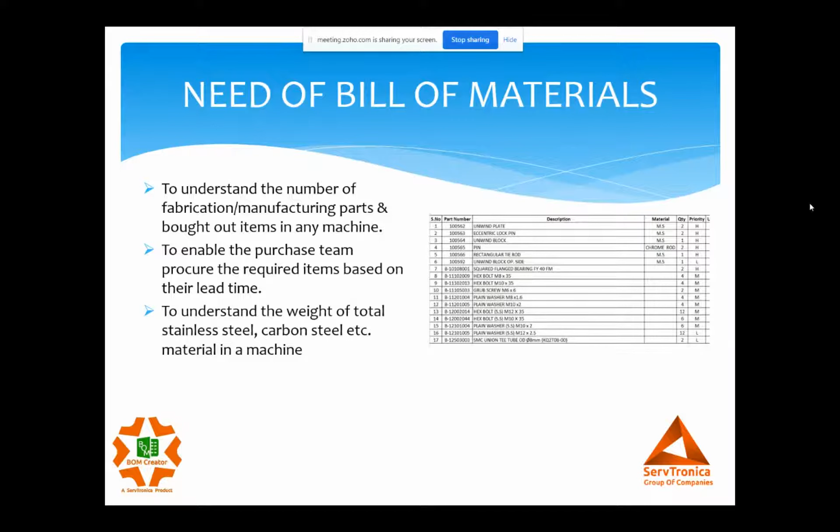To understand the weight. So if I want to make a machine, I need to know how much material is required to make this complete machine, right? That is derived from our bill of materials.

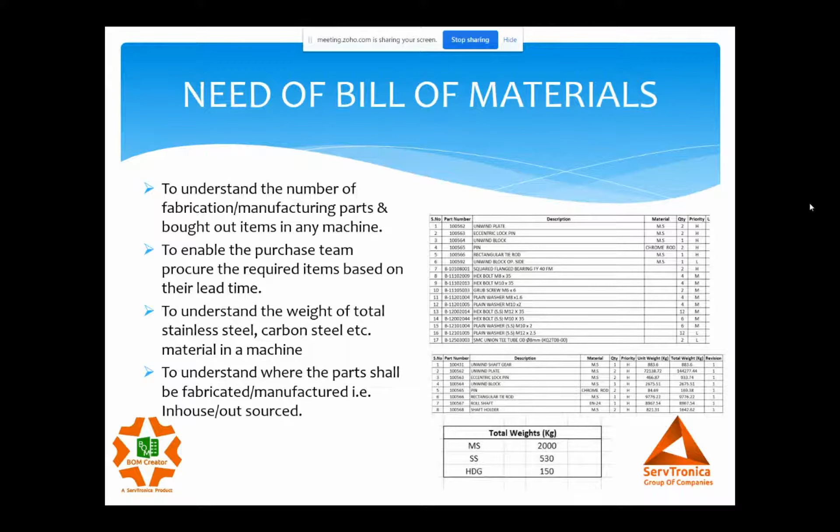Next, to understand what parts have to be manufactured outside, in-house, whatever. There are a lot of things we derive out of our bill of material. So our bill of material becomes the heart of our manufacturing. Without this, manufacturing procurement is nearly impossible.

So before going to BOM Creator, we do have bill of materials in SolidWorks also. SolidWorks does also have some bill of material. In SolidWorks, we have three types of BOMs.

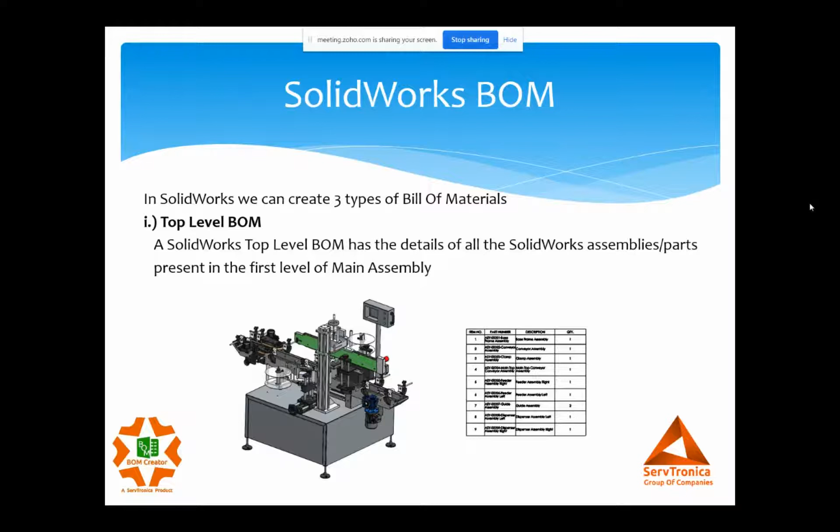First one is top level BOM. In top level bill of material, basically we get the details of all the main level components present in the first level of my main assembly. So if there's a part, an assembly, or a bought out hardware at the first level, we get the details of all those in the top level.

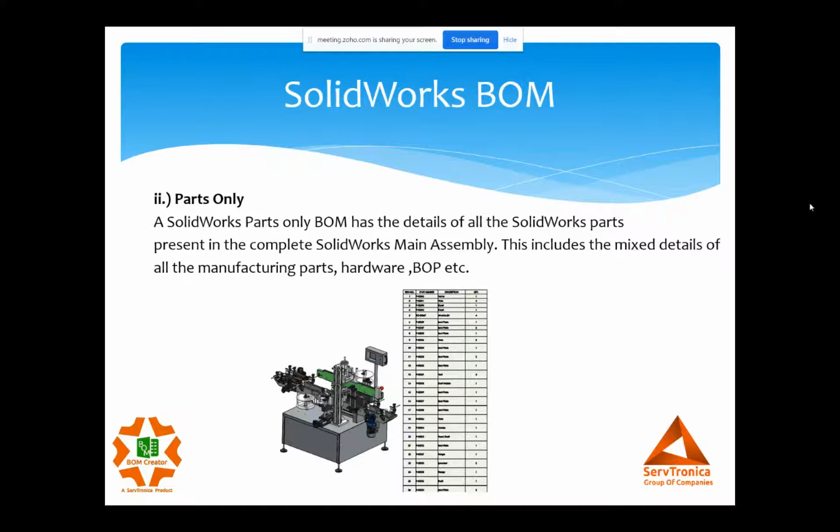Second is parts only. When we say parts only, it gives me the details of all the SolidWorks parts present in my machine. It could be a hardware, a manufacturing part, a BOP, etc. It's a mixed detail.

And SolidWorks indented BOM is something which gives you a hierarchical detail. So when I say hierarchical detail, it means like it has a lot of sub assemblies, and each sub assembly further has some child sub assemblies, some parts, some hardware. So it will give you a level by level detail.

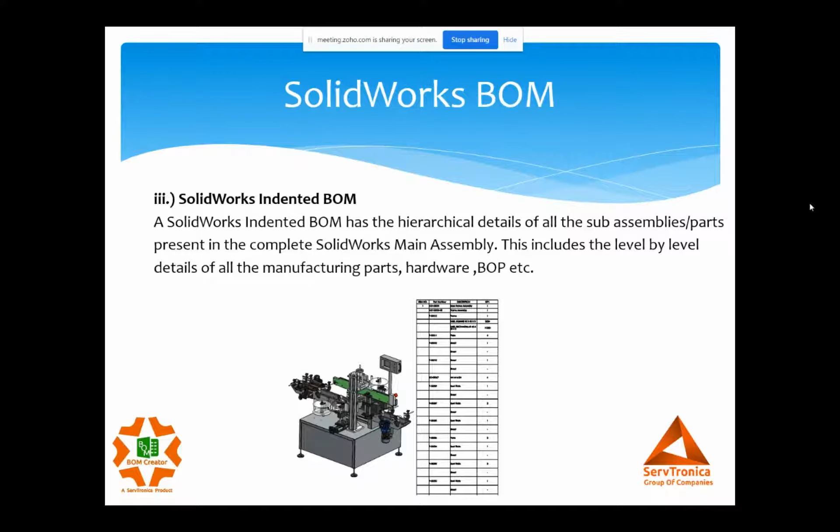So in spite of having the bill of material in SolidWorks, there are certain issues we still face in day-to-day working. The first and foremost thing we face is creating and uploading BOMs in our SAP or ERP system. We spend a lot of time in that. So when we talk about uploading BOMs in the SAP system, this becomes a critical thing.

While we need to, because look, bill of material has to be shared internally with our different departments.

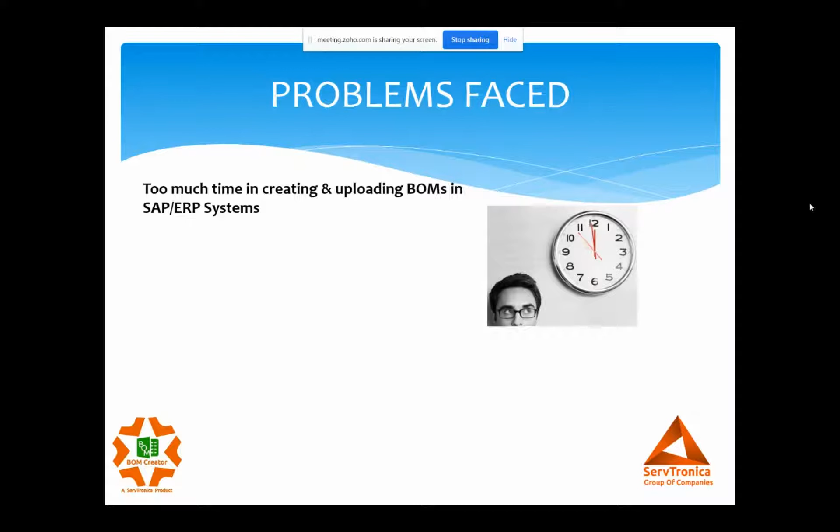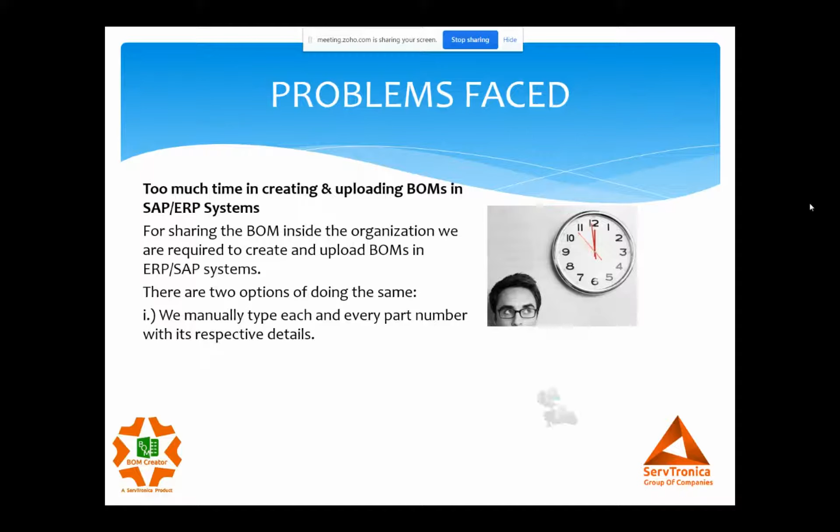So SAP or ERP becomes our platform wherein we share our details. As a designer, we sit and create BOMs. There are two ways we do it: one is we manually type each and every component's details and then upload it, or second is we create something in Excel or CSV or whatever format is compatible with our SAP or ERP system and upload it. So we do it this way for sharing internally.

And we spend a lot of time in that. When I'm handling a 1,000, 2,000 component machine, it becomes a really tedious task.

Second major issue is the chaos between design, production, and planning. This happens because of a wrong or improper BOM. And why does the BOM get wrong? Because I'm creating it manually.

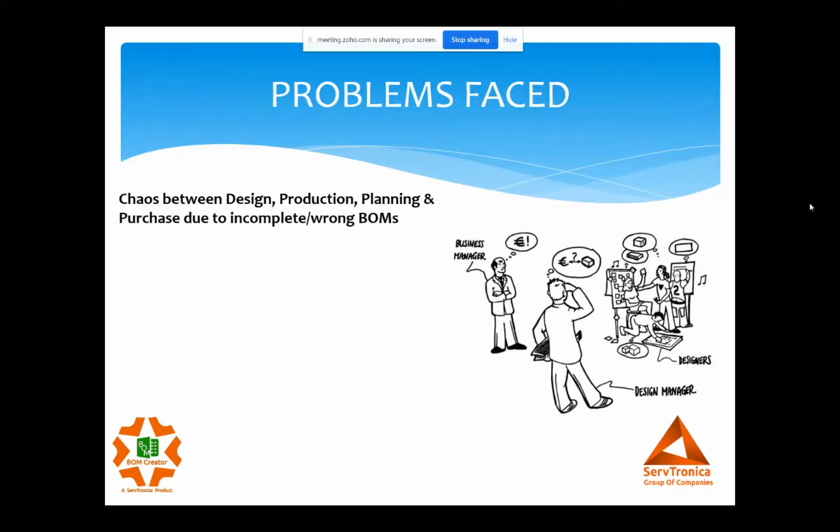When I'm creating a 2,000, 3,000 component material BOM manually, there are chances I make some mistakes. This mistake is not identified during the design phase, but is identified at the end, during assembly or during dispatch, which ends up in a lot of chaos.

Next is the segregation. Why do I segregate my parts? Production is concerned only about the manufacturing items at the initial level, since they have to fabricate everything. And purchase is concerned only about the hardware and BOP, so they don't concern themselves with the fabrication parts.

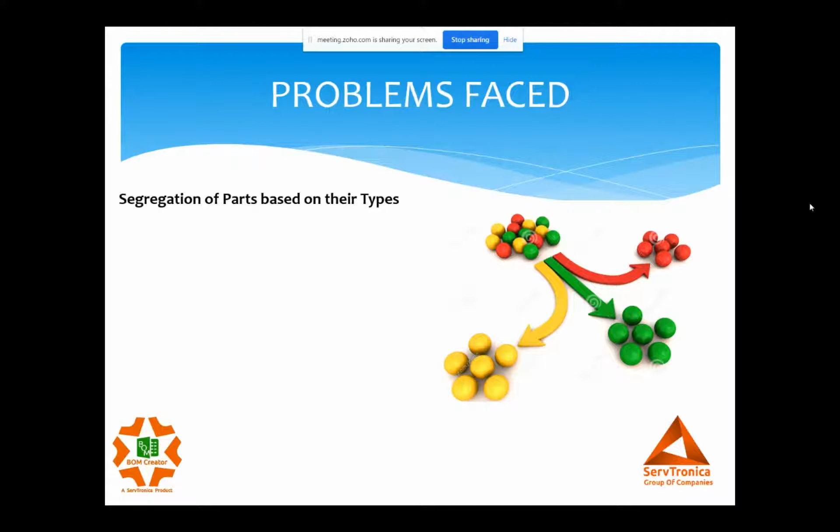So when a BOM reaches the production or purchase department, it becomes their job to segregate their respective items and start working on it. Again, it's a tedious, long time-taking job, sitting and doing manual intervention, and there's a chance we miss something.

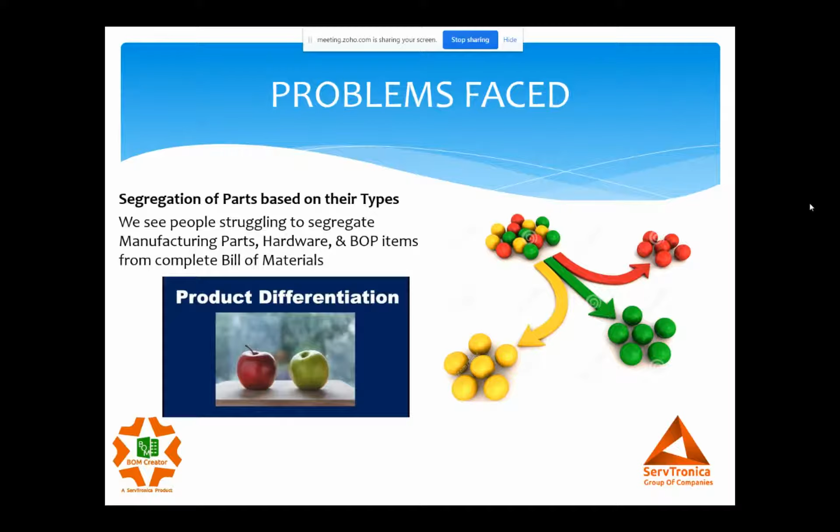Next major issue is the delay in delivery of projects because of improper planning. When we receive an order for any machine or SPM, it could be anything, we have a set delivery date. The organization says I have to deliver it within 3 months of the purchase order. So there's a set delivery date for each and every item.

In our machine, we have a lot of components, and every manufacturing component has its own manufacturing lead time. If I release a drawing today, there's a chance it could be made in 3 weeks from the date of release. There are components which could be made in 2 weeks, or even in 2 days. So every manufacturing component has its own manufacturing lead time.

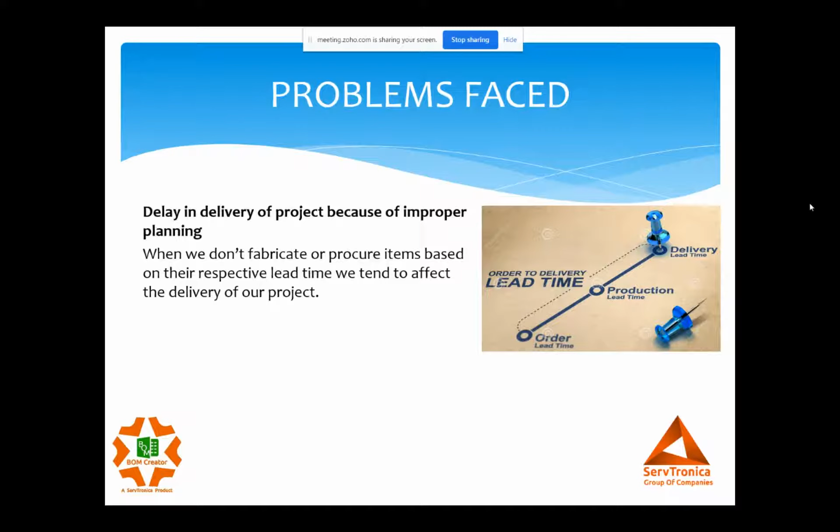So to meet our set delivery date, we need to plan them. The item taking longer time to get manufactured has to be taken first, the item taking average time would be taken next, and items taking minimum time would be taken last. If we do not prioritize these things, we end up getting our project delayed.

Next major issue is the tracking of release of drawings. The designer makes a drawing and releases it to production, purchase, quality, or any number of departments. The designer doesn't have a track of these drawings - to whom he has released them, how many times the individual has released the drawing. So sometimes the designer releases the drawing and production comes back saying they haven't received it, or they missed it.

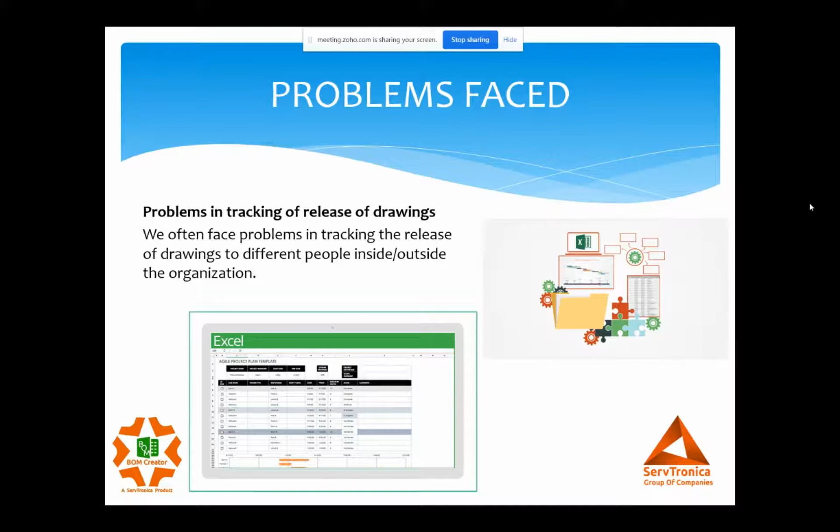Since we do not have a track of this, we maintain it in some Excel records, or maintain some register for that. But still, if we miss making an entry, we end up losing track of this particular thing, which again becomes a goof up inside the organization.

Next major issue is the actualized cost. We do some costing of the machine to understand the budget and how much cost it may take. There are important factors to consider. SolidWorks has something for costing, but it focuses more on operation cost, machining cost, bending and so on. There's something called actualized fabrication cost.

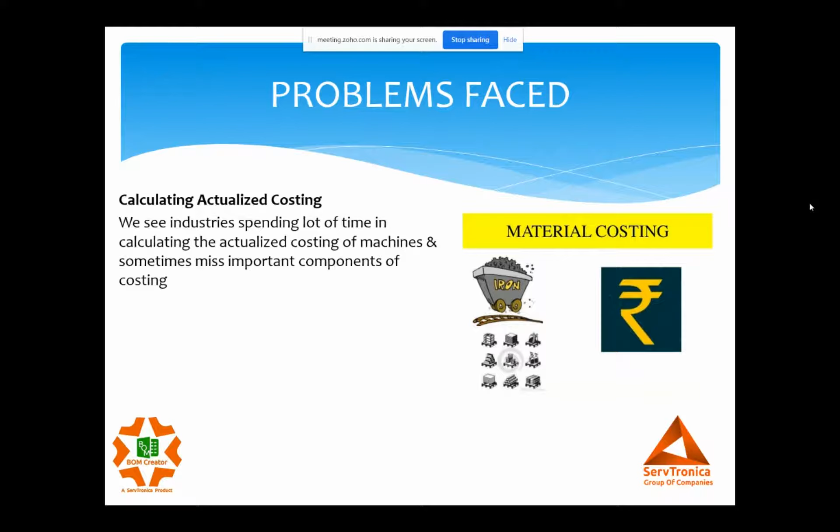So project cost, what we are talking about, we majorly consider five major components of any project: material, labor, engineering, packing, and transportation. These are the five major aspects of any project. So as to understand the budget, we need to have this actual cost in our hands, otherwise it creates a contingency in the complete project cycle.

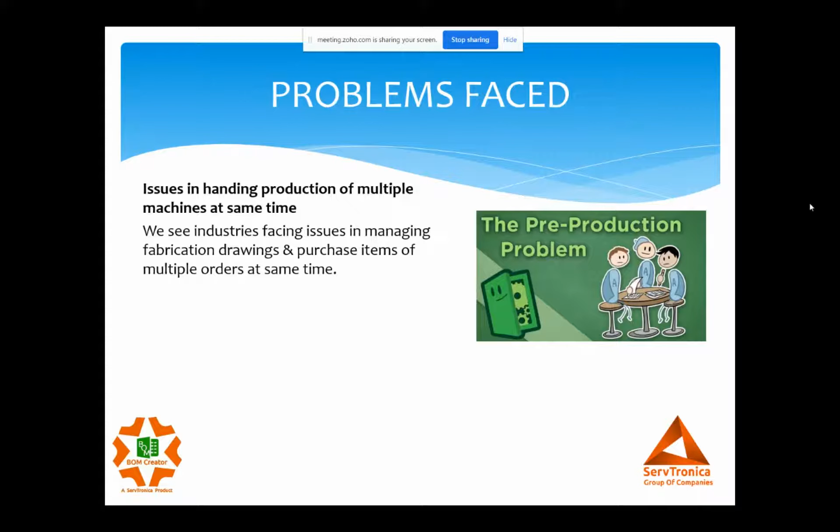Last, what we saw is the production of multiple machines. So now we are an SPM machine manufacturer, say for example, and we have 5, 6, 7 different types of machine models. So when I release these drawings or manage the production, it becomes a tough job for us. Managing multiple projects accurately is another biggest job we face.

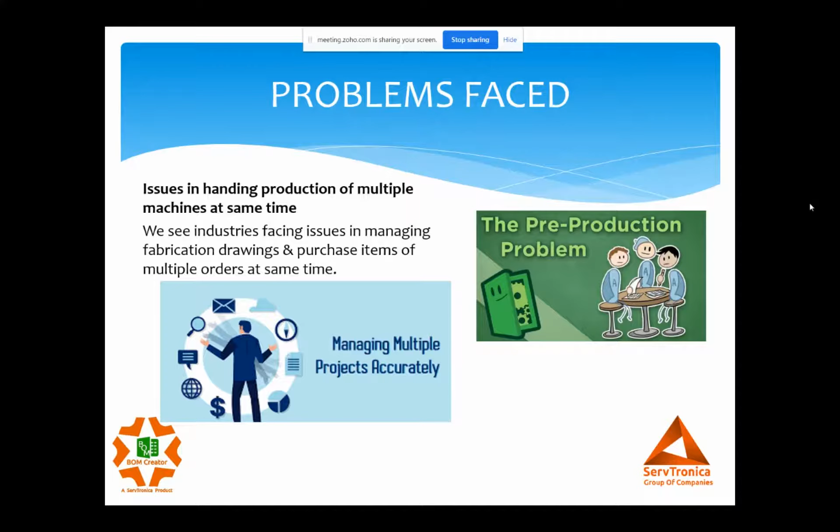Okay, so now let me take you to my BOM creator interface. Give me a second.

Hope things are clear till here. Any questions, any queries? No, I think there is no question, sir. You can continue. Yes, okay.

Can you see my screen? Yeah, it's visible. Okay, perfect. So now, this is the basic interface of our BOM creator.

So now there are two ways where we can use this BOM tool. One is from a separate interface wherein we can launch and start using it, or second is we can use it from SolidWorks itself, from the SolidWorks window. We'll see both ways. First, let me introduce you to the interface of our software, and then we'll see everything live in action.

So now the first option we see is the ERP BOM. When we talk about ERP BOM, what we are saying is you can just create a ready-to-upload ERP BOM directly from our tool. You need not modify, rearrange, or do anything else. You can quickly click, create directly from your solid model, and extract a BOM out of it directly.

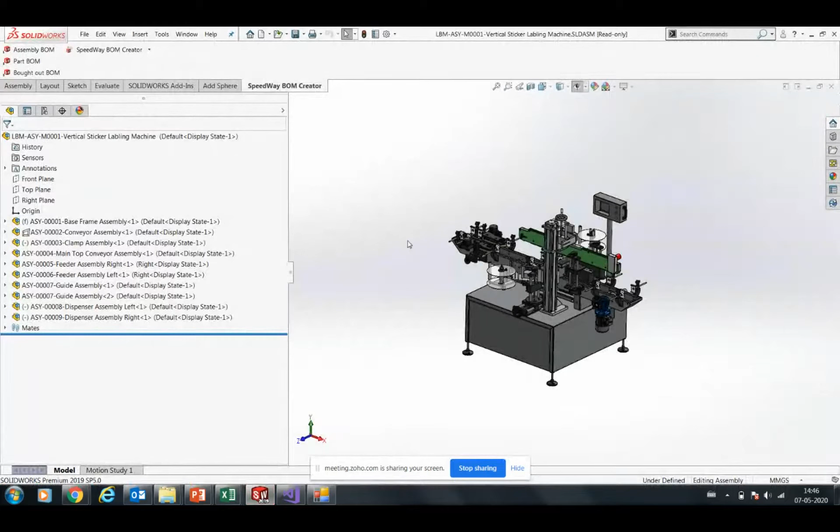Okay, so let me take you to the SolidWorks interface. Say this is a labelling machine. For well, let's understand - we'll be working on this machine for all the reports, we'll be seeing all the major reports of this machine. So now, as I said, you can have a button inside your SolidWorks window wherein you can start creating your BOMs from here also. We'll create both ways, we'll see how it is done.

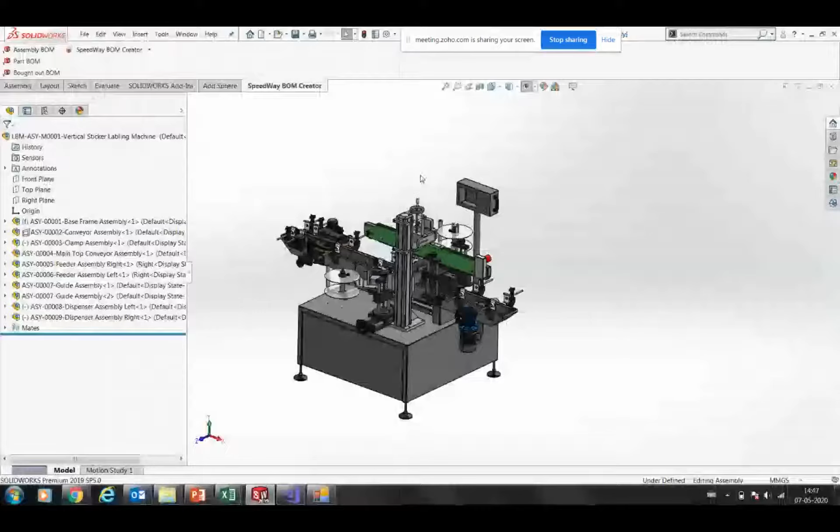So now I'll go first to the interface. I'll say I want to create ERP BOM. Now the best part of this is we will always be working with our main parent assembly of the machine - we do not care what sub-assemblies are available in that machine. We'll always work on the main machine, for which we need the complete BOM. I'll just quickly go - this is the main machine, I'll pick that and say open. Based on the size of the machine, it takes a little bit of time, and it actually creates a BOM which is in ready-to-upload format.

So here is that. So now, this is my ERP BOM. Okay. So now this format can be customized as per your organization's need, right? So when I say customize, there could be certain other fields which you need in your bill of material. So these are the default fields which we have set. These fields can be customized as per your need.

You can share your ERP or SAP format with us, and that format can be used to create it from your CAD system. Okay, so let me explain. Let me explain how this BOM is being created. Give me a second. Yeah.

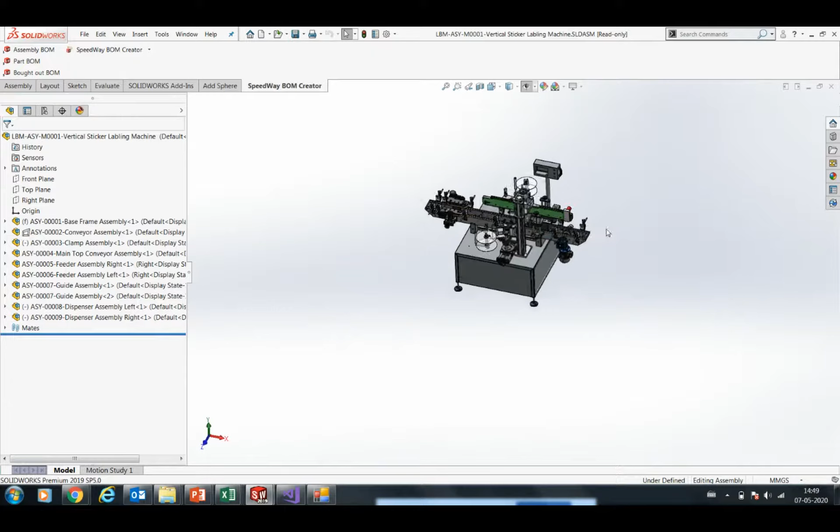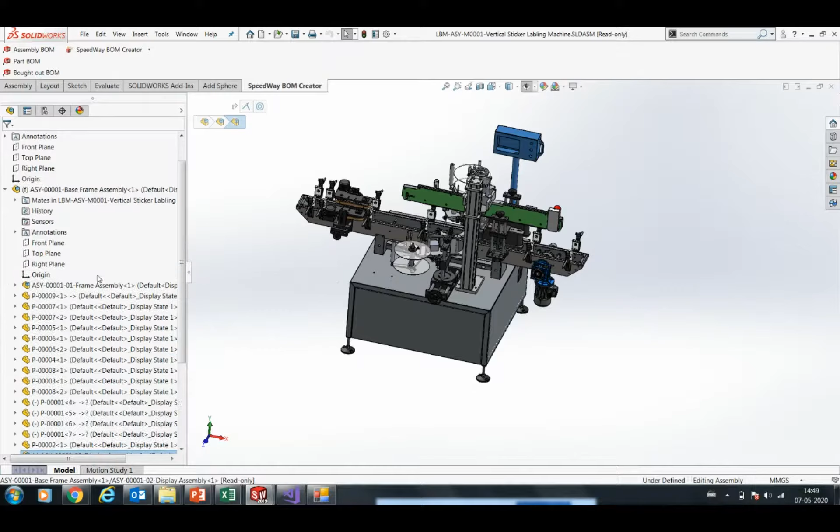So here you can see there is an ASY001 in first, second, third, fourth, fifth, sixth, seventh, and eighth, and so on. So there are first level items, and there is the first sub-assembly. There are further sub children. There are further sub-assemblies, etc. Right. So now this ERP BOM has taken the first sub-assembly. It has given its first sub-assembly and its child, its second sub-assembly and its child, and the main level components. Okay, and so on.

So it has considered each and every sub-assembly and its child level by level completely in the format. Okay, and it has given you the complete details here. Yeah, right. So this is the complete form. Going further, looking further.

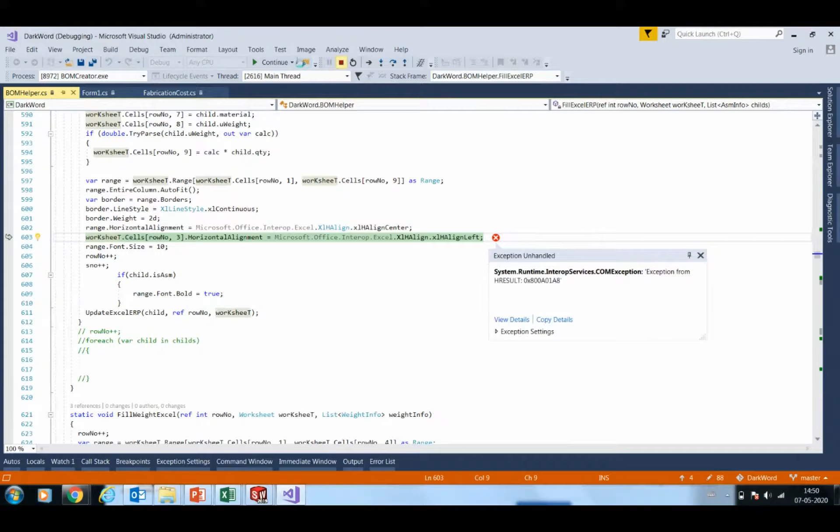Going further, we were talking about the design BOM. Say I want to create a design BOM for this. So I will just create it through the SolidWorks interface, right? So I click here, and again, as usual, it will take a little time to create the BOM, and it will start quickly populating the results.

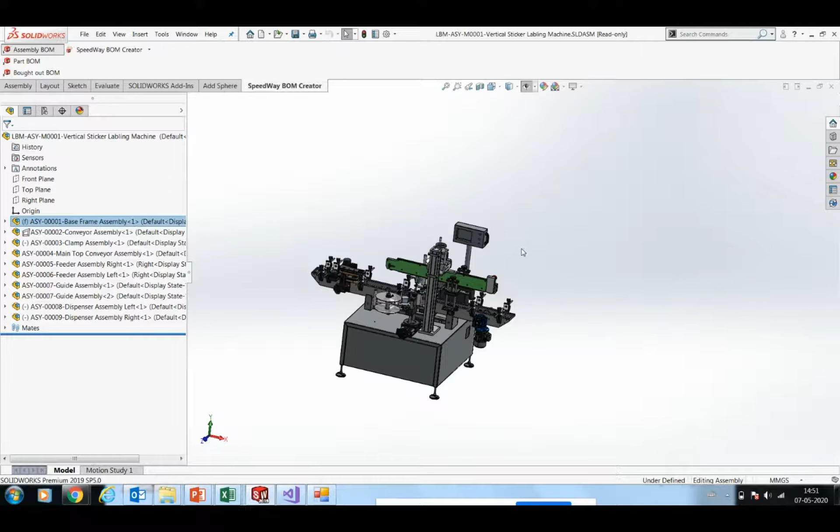Sorry. Sorry. Okay. I click here again. So yeah, there you go.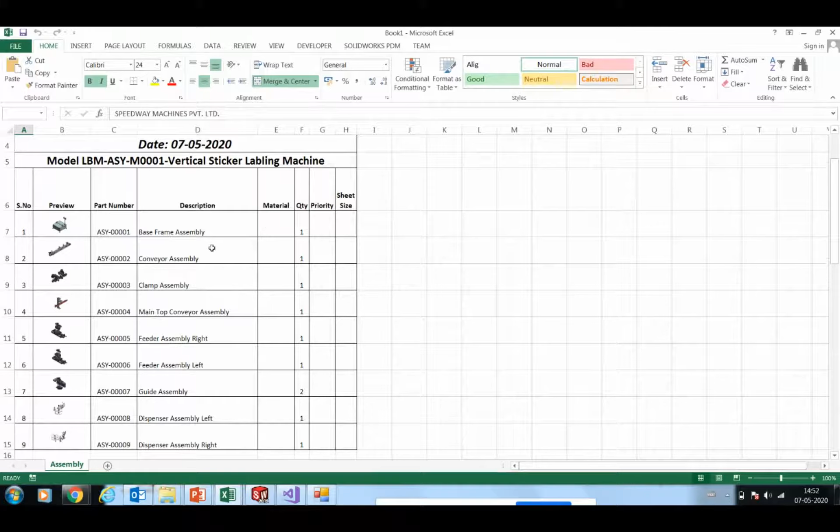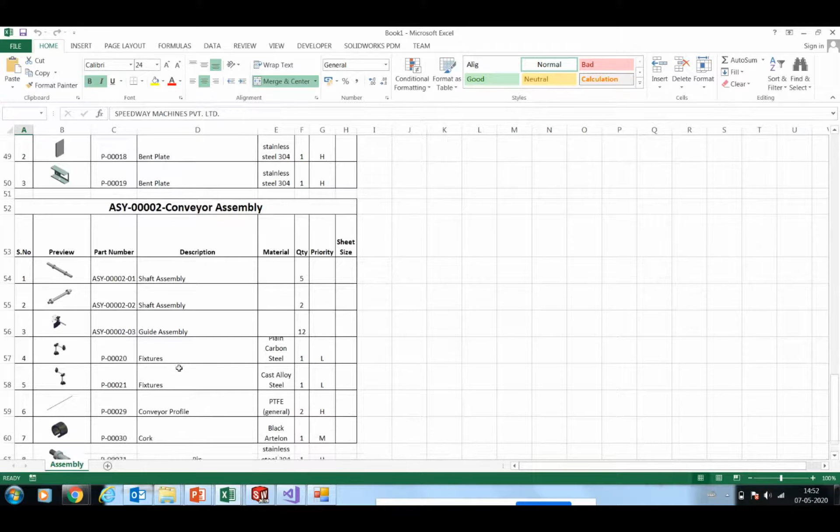So now we give you both options, if you want to create the BOM with images or without images, right? So again, as I said, it's an enhanced version of your SolidWorks generated BOM. Okay. So now it has taken the first level, and then it has given the second level and its child, and so on. So if you want to create it with images of your part or your assembly, you can do that, or else you can create it without images also. This is as per your requirement. Okay.

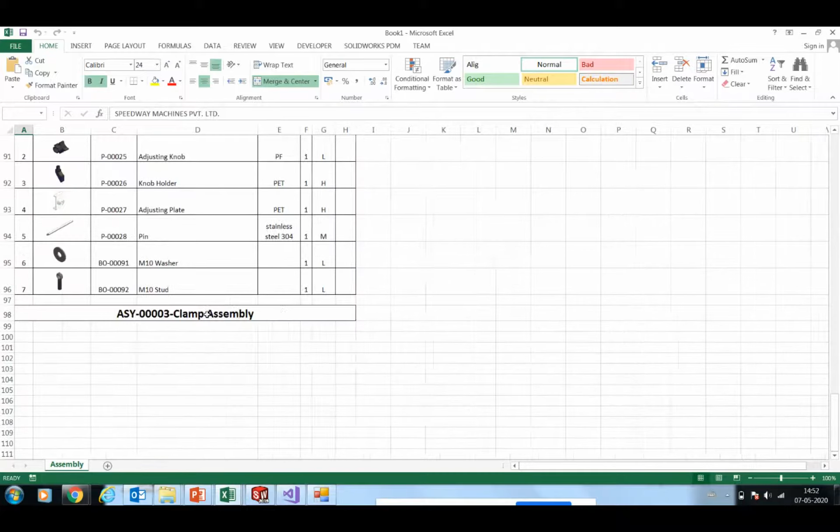So this is the bill of material, which, as I said, is an enhanced version of your SolidWorks generated BOM. So the other way, if you do not want the images, this is the way. This BOM is without images. You can create it either way. If you want the image, we can keep the image. If you do not want to keep the image, you can remove it, right? So the way you want.

right? So segregation has become easier, and all the manufacturing reports will have the weight summary at the bottom of the report, except the hardware and BOP items, since hardware and BOP items are purchased based on their quantity and numbers. They are not purchased in terms of weight. So except BOP and hardware, the rest of the reports will all have the summary of the complete list.

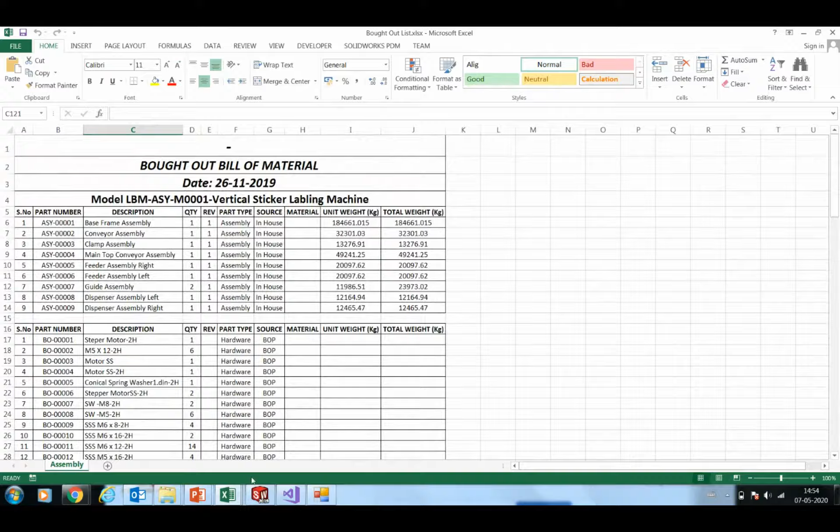Let's move further. This is the priority part list. Let's understand what this priority is. As we discussed during the initial part of the presentation, every manufactured item has its own manufacturing lead time, right? Items taking the most time to get manufactured will be part of my high priority list. The items taking average time will be my medium priority list, and the items taking the least time will be part of the low priority list.

Same goes for your bought out or hardware items. A pneumatic cylinder or a solenoid valve may take 6 weeks to get delivered from the date of order, right? So based on our project delivery dates, we have to plan everything. So we can create a priority list. We can tell the purchase team to purchase these items first, because they will take longer to get delivered, then the medium, then the lowest, right?

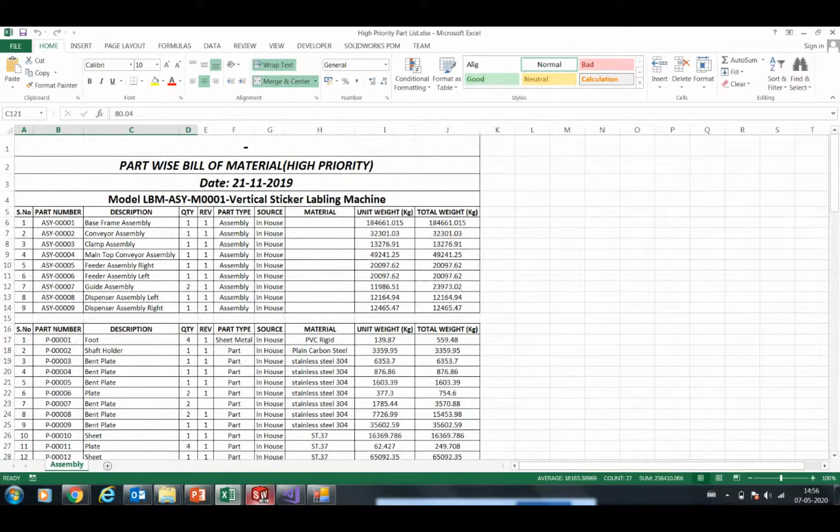So this is the part-wise high priority list. These are the parts which have higher manufacturing lead time, right? These are for the manufacturing parts. Taking further, the high priority bought out list. These are the BOP items which may take more time to get delivered from the market.

So next is the issue details, basically the drawing release details. As we said, we do not have set tracking details. We are not able to track things, right? So we are giving an option where you can keep track and identify to whom the drawing has been released, when it has been released, how many times it has been released, and the date on which we released these drawings.

So there are three major departments. If you want to add some other department in this software, that can also be done, that can be customized, if you need to add something inside this, okay.

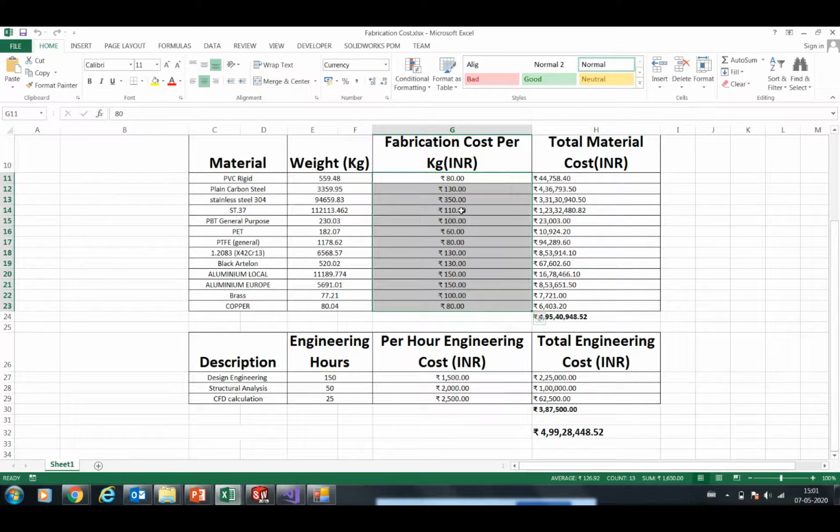My painting, anodizing, etc. Stainless steel, and I say 350 rupees a kilo. It includes my material, labor, welding, any operation. Apart from that, pickling, passivation, etc. So all this cost is included in this value. These values are set by different industries and different norms. Every industry will have their own respective industry standard value, which the material will cost them per kg.

Next important factor is the engineering: design engineering, structural analysis, or CFD calculation. Say the organization takes 150 hours for this project to complete design engineering. There's a 50-hour structural analysis job, and there's a 25-hour CFD calculation job. So now they can key in the per hour engineering cost, and they can get the engineering cost.

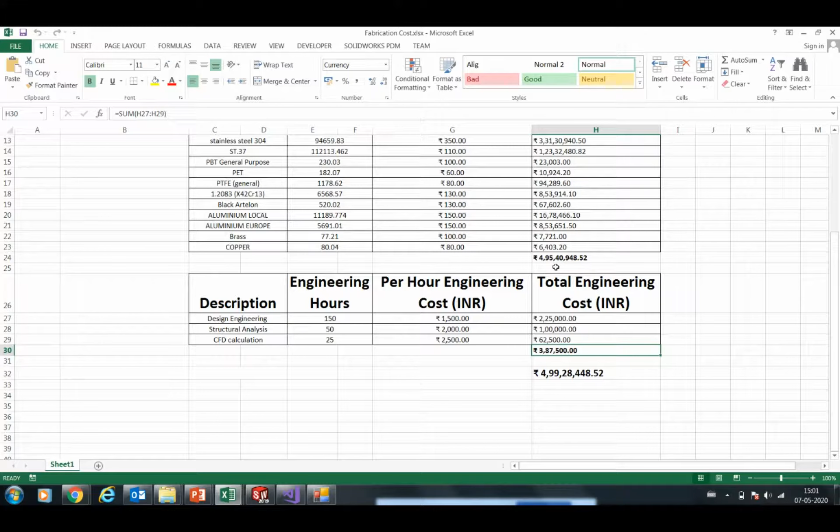We are also giving them a provision where they can put the packing box size and calculate the CFT and per CFT cost, which will eventually give them the total CFT cost, total volume, and their cost. Also, the transportation cost: you can add the type of vehicle you want, how many vehicles you need, and what will be the cost of each vehicle. So you can identify the complete project cost, right?

The last feature is the comparison of assemblies. So what is this comparison? As we discussed during the presentation, say I receive an order for 5 to 6 machines at a time. As designers, we release the drawings of individual machines separately. There could be parts which are common in all those 5 or 6 machines, and there could be some unique items, right?